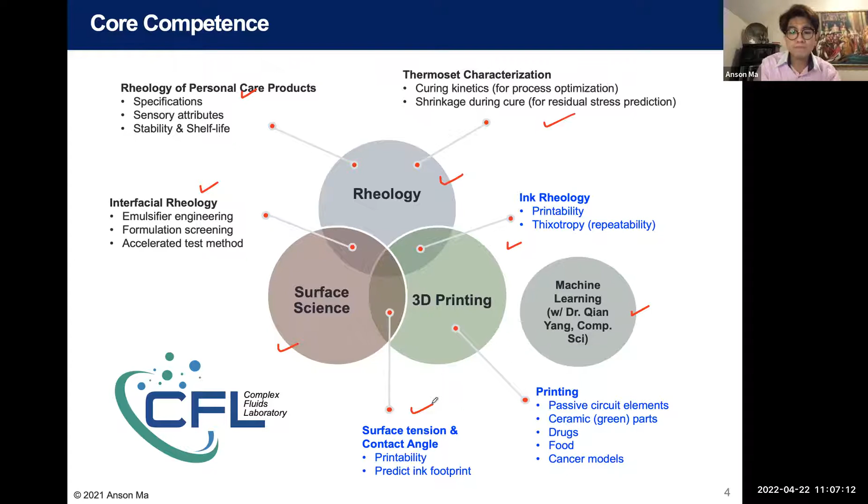In terms of application space for 3D printing or additive manufacturing in general, over the years, we have dabbled in printing polymer composites. There are different ways to do that. I'll briefly touch on that today. Then, driven by the needs from the aerospace industry and more specifically Raytheon Technologies, we started looking into all these different types of sensors that you can additively print. From wear sensors to temperature detectors to even magnets that we can 3D print using different methods.

And then working with colleagues in biomedical engineering and also our medical school, UConn Health, we have been toying with the idea of printing different biomaterials so that you can use it for disease models, or you can think about regenerative medicine applications. In today's talk, I mentioned edible products in the abstract, so we definitely are going to touch on drug tablets. And the last topic I'm going to touch on is food.

So Krishna mentioned that you guys are going to have lunch after this, right? So hopefully I'll make you hungrier than before.

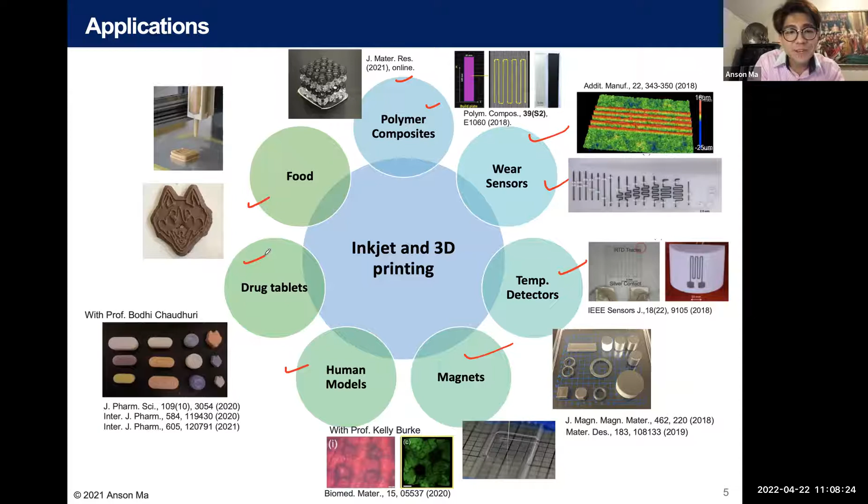So let me first talk about carbon nanocomposites printing. This is very early work that we started. I think this work started because at that time, there's a company called MakerBot. And after the patent from Stratasys expired, more companies were doing this kind of low-cost printer. At that time, you could buy a printer at a relatively low cost. And for research, a few hundred dollars is not a lot for an instrument, right? So we started with that like everyone else.

The way that this printing method works is called fused filament fabrication or fused deposition modeling. You can imagine that you have a hot glue gun. In the back end, you feed a polymer filament, usually a thermoplastic material. And then there's a pinch roller mechanism that is spring loaded, and you push your filament into a chamber. In this chamber, you heat up the material so that it melts. Then you use the filament in the back to push the material that has been liquefied, push it through a nozzle, and start depositing.

So the way I describe it, to remember this, is kind of like a glorified hot glue gun approach, right? You take a hot glue gun and you mount it on a gantry system. There you go, you have a printer. Cost-wise, it's not that much, but to do it very well, it costs money, and to maintain all this temperature gradient and so on, there's a lot of know-how, and also to formulate the right polymers to be able to use these kinds of printers.

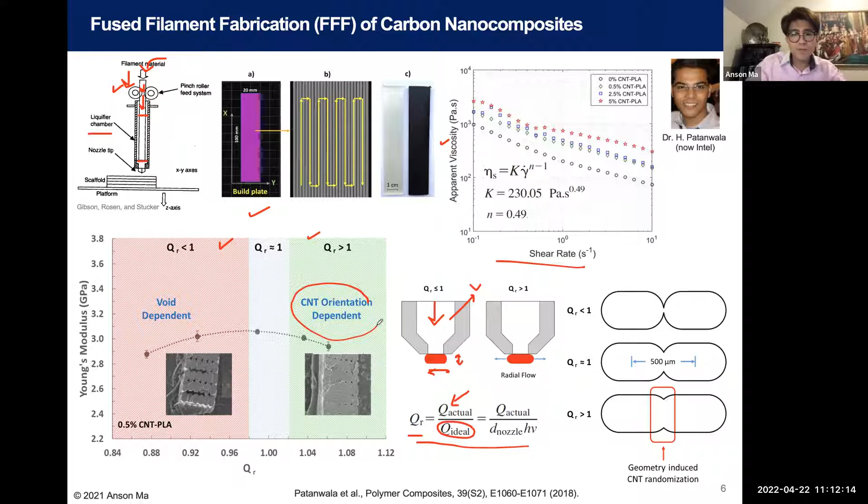orientation of the fillers. So this is kind of like an early work that we did, and we published this in Polymer Composites. So that was a very low entry barrier. Everyone can do that kind of project. Then we said, okay, can we do something fancier and more intricate, for example, like this kind of lattice structures.

What you're seeing here on the right-hand side, the black layers are actually materials filled with carbon nanotubes. And in between, you can see these lattice structures where the more translucent layers are just the neat resin. So here, this is a printer that we put together, and it was work supported by the SHAP3D Center. It's called the multi-material digital light processing method.

So I will play this video and I'll explain as we go. Hopefully it will cooperate. As you can see here, there's two syringes. The clear syringe material will make the translucent layer, and the black material will be infused with nanotubes, and we will dispense this onto a translation stage. So you can see we're creating two puddles: one with just the neat resin, which is a photo resin, and the other infused with nanotubes.

And here you can see the stage moves down. This is the build plate, and there's a projector from below. So now I'm projecting a pattern onto that layer and doing the photo cross-linking for that layer. After that, I move out the stage. You see there's a tiny metal piece here; this is an air system to blow away the excess material. After removing the excess material as much as we can, we dip it into a second puddle with a different material.

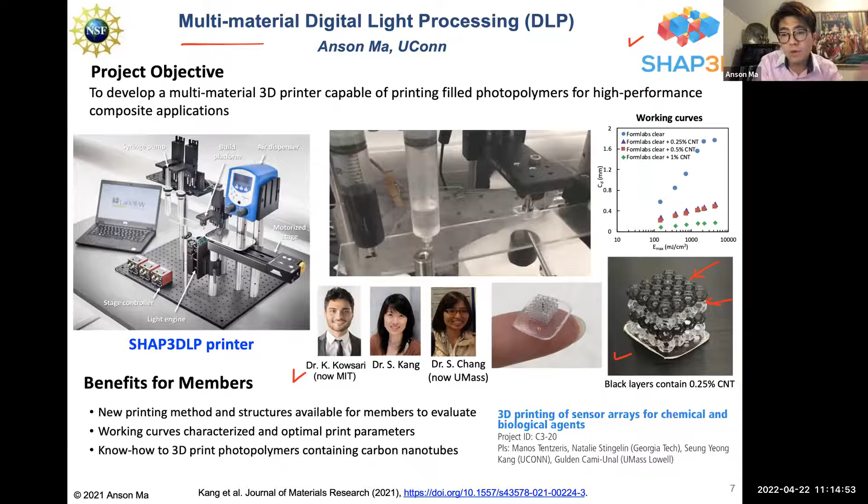This was work done by Kevin and Sally and Xinyun. Sally was a postdoc working on this project, and then she got a faculty position at UConn, and now she's just across the street from my office. She continues to do more work using this platform for making sensors and other wonderful things as part of the SHAP3D project with Georgia Tech and UMass. And I try to be as hands-off as possible.

Now, in addition to polymer composites, we can also think about printing sensors, and this is really driven by the need to serve the aerospace industry, especially in Connecticut. We have the whole supply chain because of what used to be United Technologies, now Raytheon Technologies. This was work supported by them, and Alan was the PhD student who worked on this project.

What we have here is also an extrusion-based method, similar to fused deposition modeling or fused filament fabrication, except that you use gas pressure on the back end. Imagine you have some gas pressure here and then the ink. This is called direct ink writing. To control the printing, we have this rod that moves up and down, with O-rings sealing it off. By moving this rod up and down, we can control the dispensing of the material. So this is a pneumatic drive, but to control it, instead of messing with the pressure, where there's more transients involved.

We actually use the valve to turn on and off to deliver the material. And by doing the printing of the material, we can create sensors. So this is all printed.

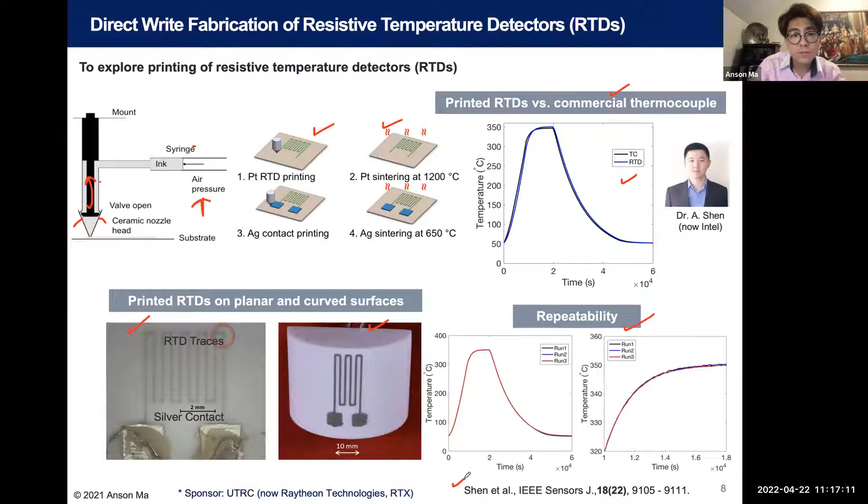Now, since I talked about the importance of rheology, I would like to convince you, and hopefully by the end of this talk, you will appreciate that rheology is important. So let's say you have a new project and someone asks you to do some printing using the direct ink writing method that I just described on the previous slide. And then you have different options of inks, right? How do you know which ink is good?

So rheology is a good way to fingerprint that before you load it into the printer and realize the thing doesn't work, right? Another way to make it work, if it does settle, is to remix it. You can throw it in a speed mixer or something to remix it before use. But this helps you identify how long a workable window you have for the material.

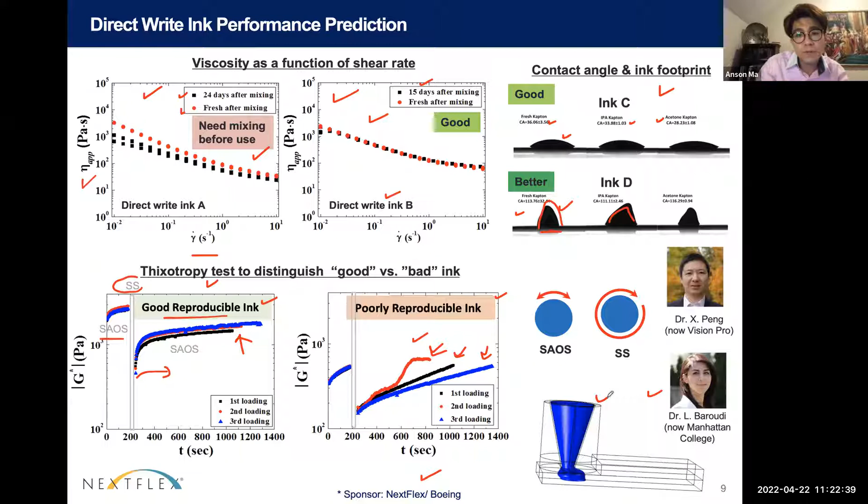And back then also my former postdoc, Lena, she did some simulations. You can also run some simulations, try to understand how the ink rheology would impact the footprint of the line, and also how the processing conditions, like how fast you're dragging the nozzle and how fast you're pumping the material, would influence the print line resolution. And this is kind of the student carrying on that work.

And this is the tool that we use for the direct ink writing. And then you can do different rheology measurements for the materials. These are some of these commercial materials, and some we took the commercial material and did some modification to it. This work has already been published, but the idea back then is to create very high resolution lines.

So it comes back to this rheology curve again. So this is apparent viscosity versus shear rate. All these materials shear thin. Again, the viscosity decreases as a function of increasing shear rate. And in this kind of printing, usually this is perceived to be a good thing, because when you're pushing on the ink material, actually the viscosity drops, right? So it doesn't take a lot of energy or pressure to drive out your material. So that's a good thing.

But once the material is deposited onto the substrate, the viscosity goes up, because on the substrate, you're not really actively shearing the material. So in that case, you'll be more looking at a low shear or even zero shear kind of viscosity. So the higher the merrier, right?

So in other words, shear thinning is usually advantageous for this type of printing, because during the pumping or pressure action, you bring down the viscosity, but as soon as the material is deposited on the substrate, the shear rate diminishes, meaning that you're moving in this direction in a viscosity plot, and then the viscosity goes up. So then you kind of maintain the shape fidelity of whatever you just printed. So in general, it's a good thing.

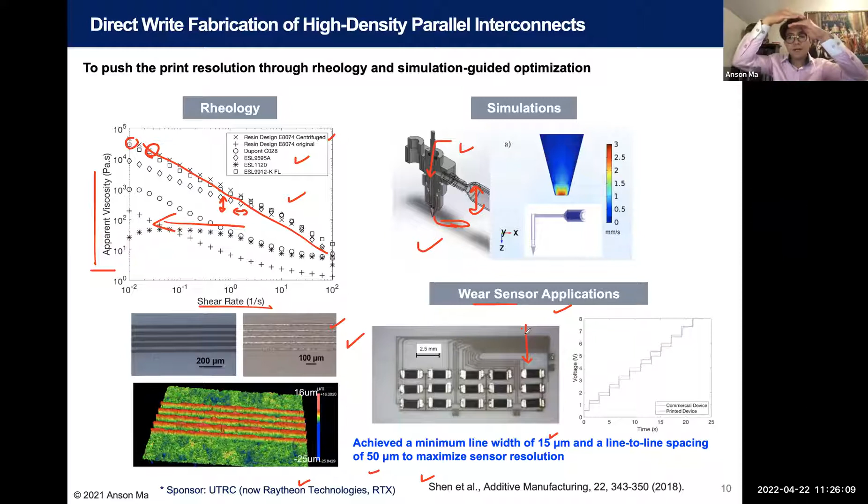So what happened is, imagine this thing is embedded inside a coating. As the coating wears off, it cuts through all these lines. It's going to break some of the circuitry. And then as it breaks, it actually sends off a voltage. So by having all these lines as close as possible, you will have a very high resolution wear sensor.

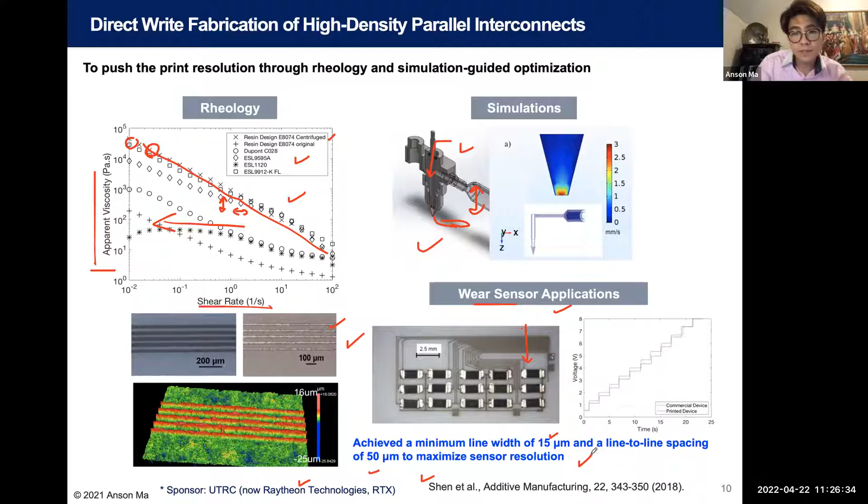Again, it comes from the fact that as the material wears off, you can see a change in the voltage. So the smaller the line spacing that you can do, the higher the sensitivity that you have for your wear sensor. So that's why we want to minimize the line width and also the line-to-line spacing for this sensor. And then the trick has to do with the rheology.

And again, you're seeing a lot of these rheology plots. Probably you will dream about this tonight.

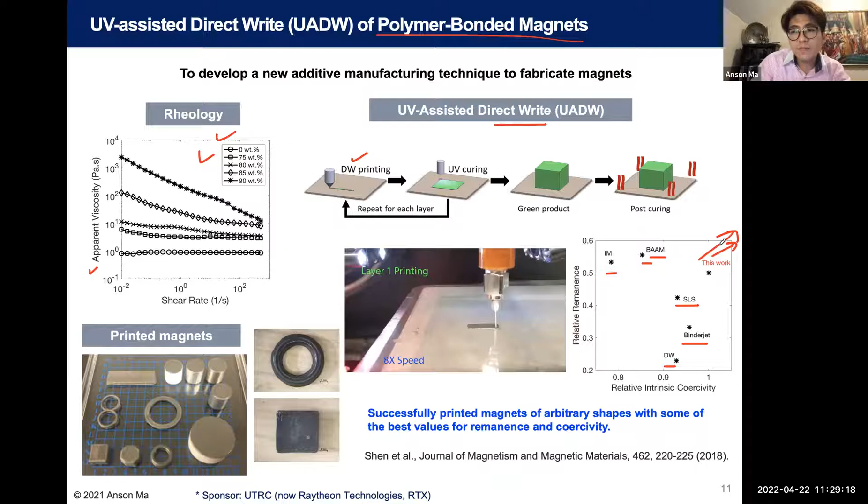So that's the angle of this work that we did. Now, the sponsor was happy after we published that paper. He said, yay, you're doing pretty good, but can we do even better? So can we move in this direction even further?

And the answer is yes, but that got us right into trouble, because one way to improve the performance of those polymer magnets that we 3D print is to use a different source of magnetic particles. The ones that we were using before on the previous slide were made with the atomization process. And then the sponsor said, hey, we have some good stuff that is based on melt spinning.

Now, if you look at the particle morphology, they're much more jagged, right? So it's more irregular shaped. And if you look at the viscosity, when you disperse it at the same volume fraction in the resin, in the photopolymer, it's actually 100 times more viscous. So then we have big trouble printing that stuff. So then what do we do?

It goes back to some work done in the 70s, a long time ago, when people looked at suspension rheology. One thing they realized is that it's not just the volume fraction of particles you put in there, but the particle size distribution also matters. Let's say you have a bimodal particle system: you have big particles and you have small particles.

By manipulating the particle size ratio between the big and the small particles, and also how many big particles relative to the small particles, you can actually find a sweet spot. You can think of this as a space filling exercise, right? You have the big particles, but in between them you have tiny space. If you have smaller particles that fit in that space, you can pack more. So by doing that, you can push up the particle volume fraction without jumping up the viscosity as much.

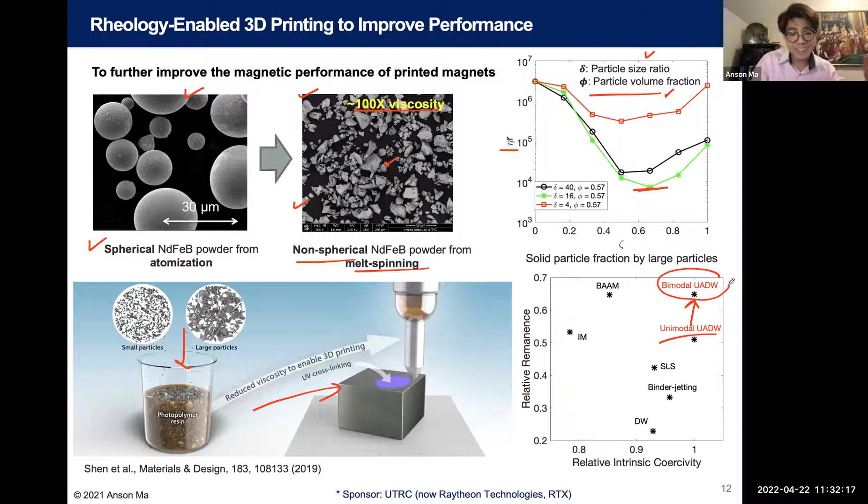So that is again to hopefully convince you that rheology is important, and that some of the stuff you learn in your rheology class may be important, right? Back in the 70s, people already knew this, but at the time they didn't worry about 3D printing. Now we worry about 3D printing, but these good old tricks from the 70s still work beautifully with newer print technology and research.

Now I'm going to switch gears to talk about another print method, which is called binder jet printing. Let me take the time to explain what it is. The previous cases were extrusion based, right? We squeeze out a material, we can do UV curing, for example, but this is a fundamentally different technology. This is based on inkjet technologies. Inkjet has been around for a long time, since the 70s. Traditionally, it's used to make barcodes and graphic printing.

You may have one of those home use inkjet printers sitting at home. Obviously, there's some annoying things about those, right? If you don't use it for a long time, the nozzles clog up and all those issues. We sometimes have similar issues, even with those customized for 3D printing.

Anyway, so what binder jet is: let's say you have some powder material. You first spread a layer of powder, and after that, you use inkjet to jet a liquid binder. Once the binder reaches the powder, it's going to penetrate and wick into the powder bed, spreading both laterally and in depth. So you put a particular pattern, inkjet the binder to glue the powder together, and then you move the build platform down and coat another layer of powder on top.

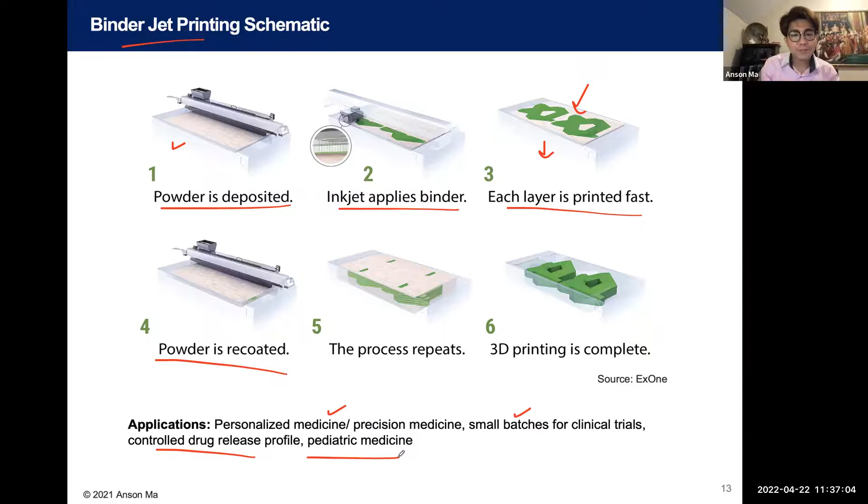And the last thing here is, I gave a talk at one of the pharmaceutical companies. And because at that time we were also making chocolate and stuff, they said, well, that would be nice because our pediatric medicine could use some of that to encourage the children to take the medication.

Anyway, so let's say we were to do some binder jet printing, now you know what it is. For pharmaceutical applications, one of the first things that we want to do, especially if you have a new formulation that you have no idea whether or not it's going to work, is do some kind of characterization. This is a dimensionless number called the Ohnesorge number. You can think of it as a dimensionless viscosity. So the higher this number, that means it's very viscous relative to the surface tension.

And in the inkjet process, you're playing the game of surface forces versus inertia versus viscous forces. So by calculating the Ohnesorge number, empirically, a certain range would give you good, consistent jetting. But as I mentioned, it is a dimensionless viscosity. If it's too low, then you form a lot of tiny drops. It's almost like spraying, not coming out very consistently, spraying all over the place. And fundamentally, that's because of the Rayleigh instability.

But today, I don't think we have a lot of time to cover that. But conversely, if the viscosity is too high, it's also problematic because you don't have enough energy to jet the material. So if you look at a lot of literature in inkjet, this is usually a good starting point. Let's say if you create an ink, you measure the viscosity, you measure the surface tension, you measure the density, you know the nozzle diameter, then you can calculate this number, and that gives you a sense how far off you are from this magic regime 0.1 to 1.

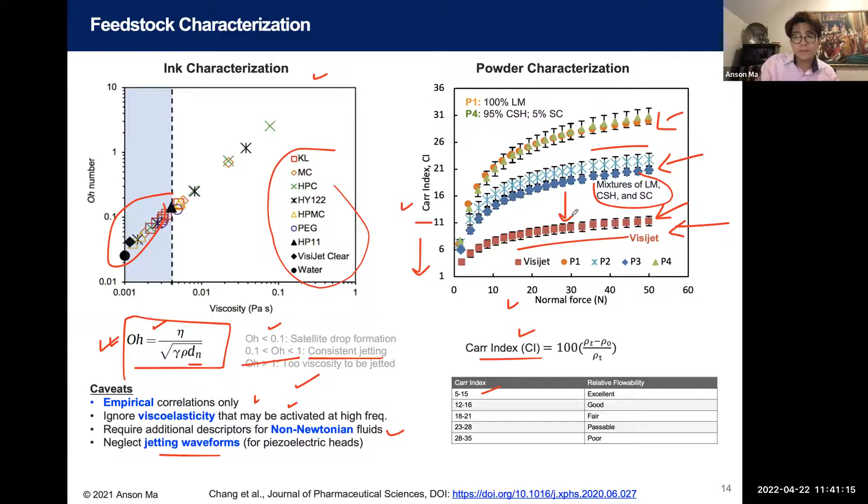So again, this is giving you a sense: if I have a new application and I need to work with a new powder, you may want to do a little bit of this so that you get a sense of how well your material could be spread based on this benchmarking against existing materials.

Then this is a slide just showing the actual print process in action. So this is a commercial printer. It costs about $50,000 from 3D Systems. It used to be called Z Corp machines, but 3D Systems bought them. By the way, there's a lot of changeover and merging in the 3D printing space because it's still a high growth area.

And if you look here, this is just having the powder spread, and then you can see the bar comes in, and then you can see the inkjet head that's moving. And then we keep on doing the binder jet process. And then you can go from digital design like this. And you see a lot of UConn and Huskies, not surprisingly, Husky is our mascot for the sports team. So we can convert from a digital design to various designs. It's very flexible. You don't need to change the mold or anything. You just change the digital design. If you have the right formulation, you can print.

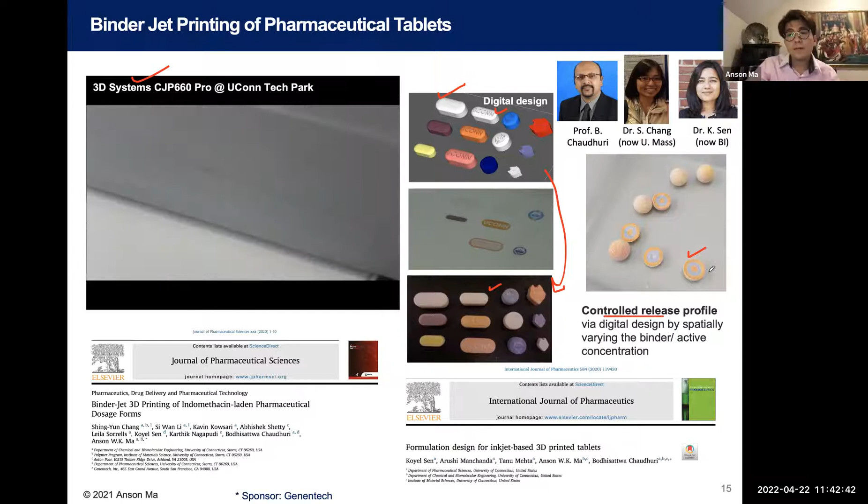And this is what I was talking about earlier, right? By doing this digitally, you can also change the design so that you can have these concentric spheres. Like you can see, I pretend that the orange color is one drug, the blue is another drug. So you can do sectioning, A, B, A, B. And then by the time this releases, it will come out in an alternating sequence. So that's the beauty of doing printing for pharmaceuticals.

And then after 2 years, we learned how to play with that commercial machine and hijack the machine essentially. Then we built our own machine. So this is called Husky Jet, and there's a YouTube.

I'm not going to play it here, but there's a YouTube video for this Husky Jet. This is a tool that is about 7 feet long. It's much bigger in person than in the picture. And it comes with all the bells and whistles and all these systems, which I'm going to highlight a little bit. So it comes with the inkjet print heads, obviously, and then it comes with UV curing capability, infrared capabilities.

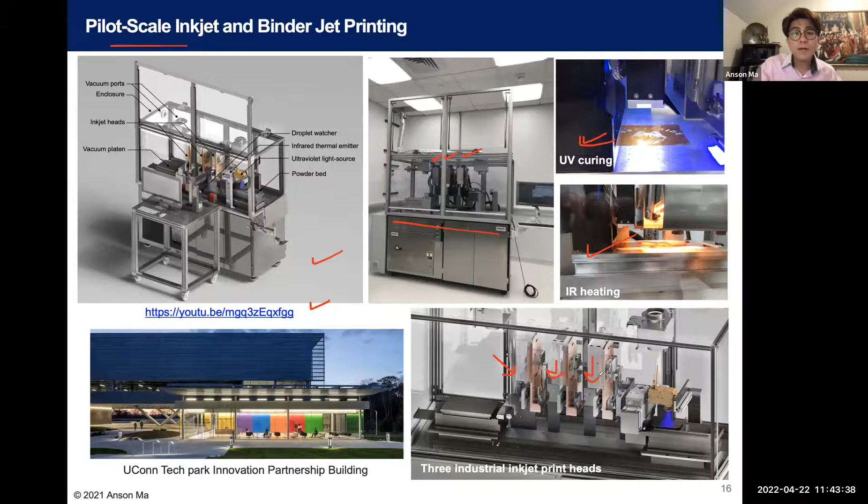And we have 3 industrial print heads here. These are high throughput print heads. You see these are pretty much fixed mounts because they're too heavy to move around. So you can use this kind of print head for high throughput roll-to-roll processing, for example. And then the first test that we did was, we take this and then we have a drop watcher system so we can put in some different materials.

This was a small project that we did on printing dielectric ink on various flexible substrates for the NextFlex Institute. And then you can put down silver ink in different patterns to make passive circuit elements and things like that. This is an animation I'm just going to show quickly. So the Husky Jet could be operated in the binder jet mode as well. And now hopefully you know what binder jet is.

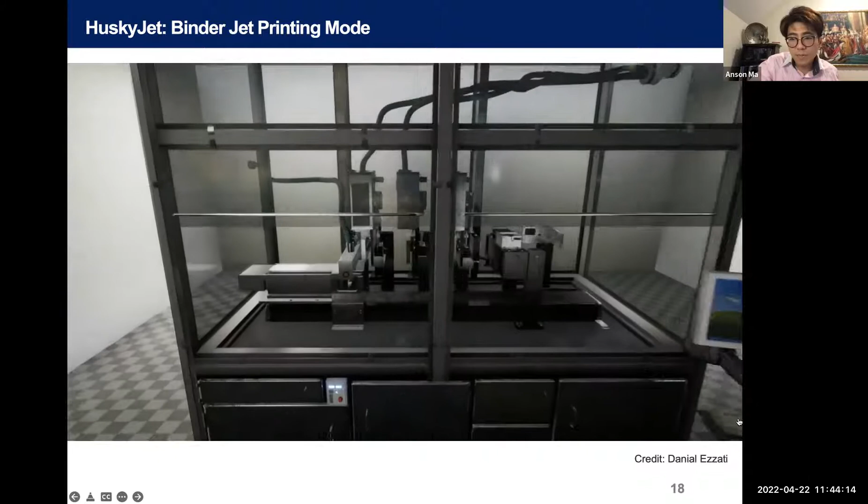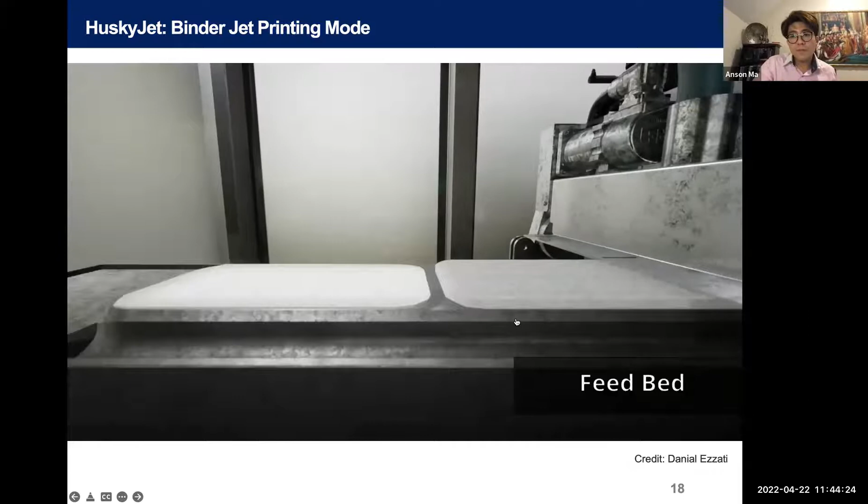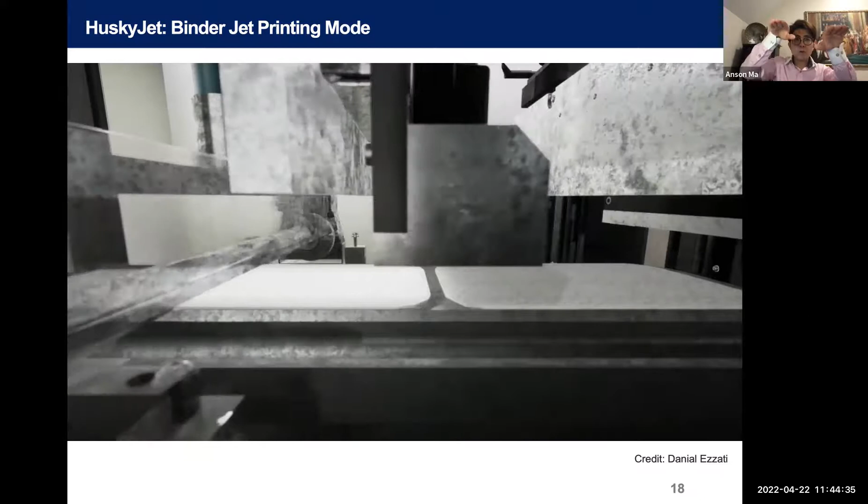So this is just zooming in, let me mute this. So there are 2 powder chambers. This is the feed and this is the build. The one that is closer to this view is the build. And then what happens is we are moving the build and the feed beds, and the powder is being pushed from the feed to the build. And then we can control how much feed material by how much we raise the first platform and how much we move down the second platform.

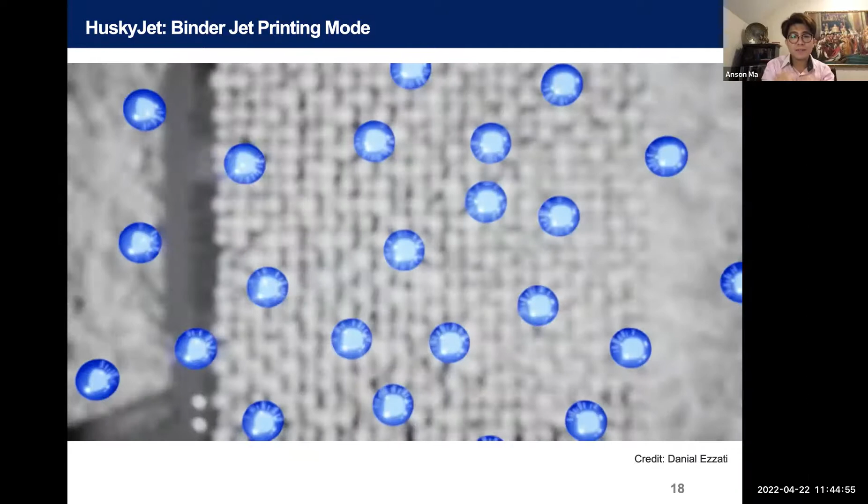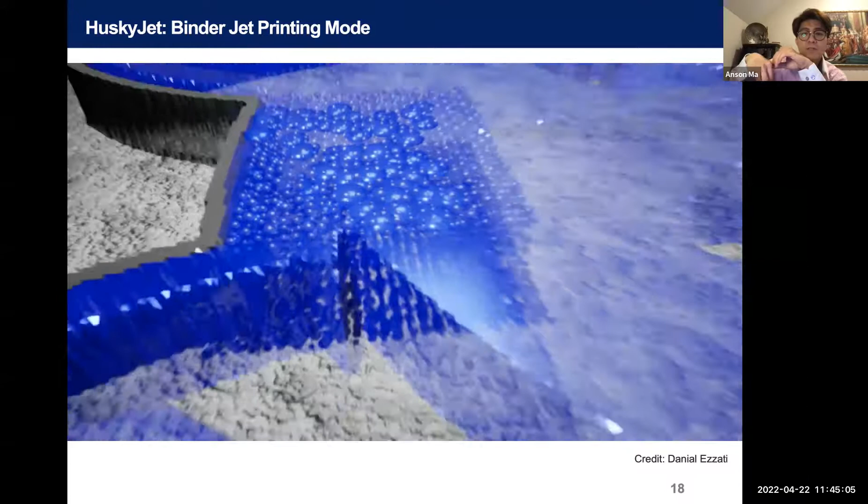And after that, the whole unit moves under the inkjet print heads. And then you can see the inks are coming down, and it's kind of gluing the powder together. And this is an animation showing how the ink droplets impinge the powder, and then you have some spreading and some penetration as well. And then, again, this is Husky. So sorry for the hassle, but this is a UConn machine.

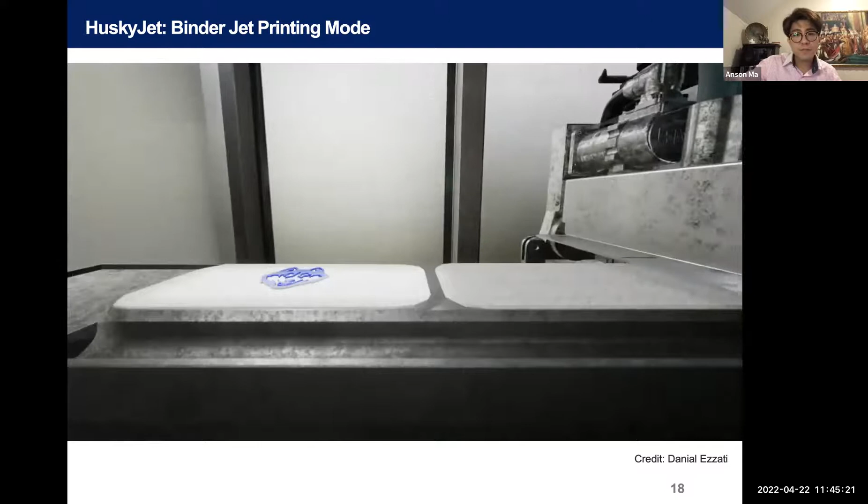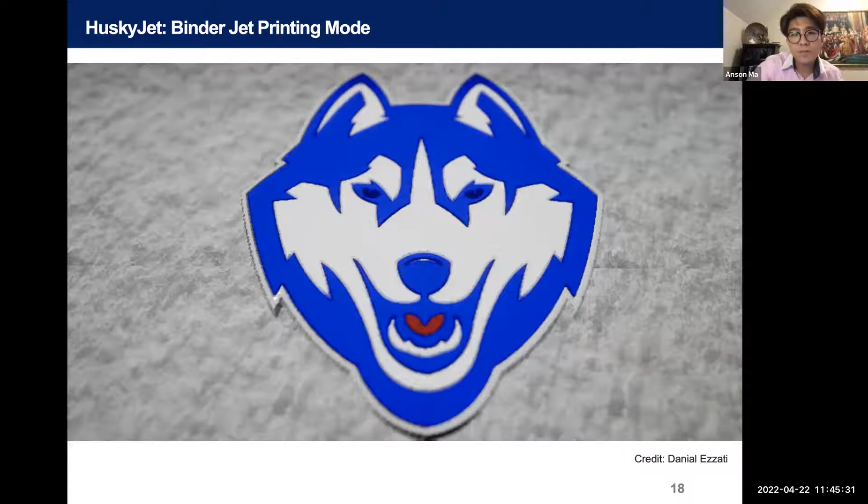And then you can put down different colors. We have 3 print heads, so we can put down up to three colors, 3 different materials. And then this process is being repeated. So you keep going back and forth, back and forth. You do powder spreading, inkjet, powder spreading, inkjet, so on and so forth. So then you can make the whole husky. This is the HuskyJet.

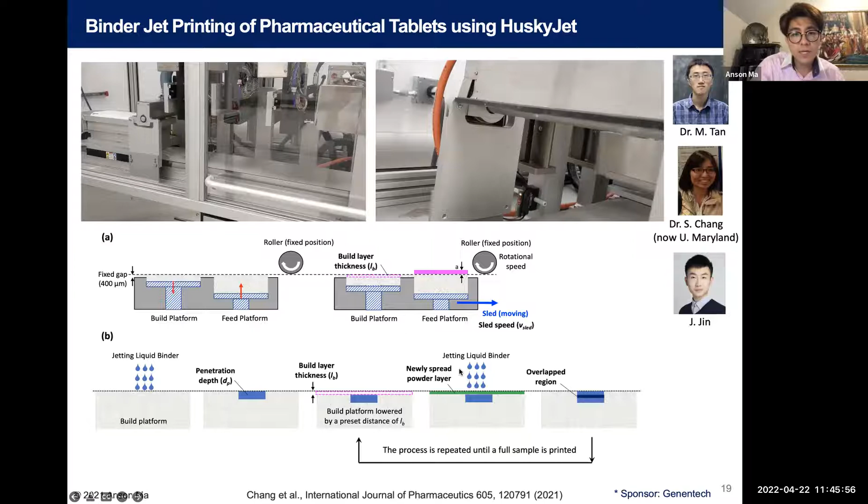And then in reality, not the metaverse, this is how it works. So it's kind of like in the animation. We're spreading the powder using this roller mechanism by moving the whole build platform. And then we have some process parameters that we can control, and then we can make 3D parts. And we use it for making pharmaceutical tablets again. And because we built our machine, we have full control in terms of the process parameters.

One important parameter that you want to consider is, let's say you have the powder and you jet down some ink, how much binder is penetrating in the powder bed. The blue color here indicates the thickness, how much binder is wetting the powder bed. And imagine that if it doesn't wet too much, and you spread a lot of powder on top, then when you print the second layer, there would be a disconnect between the first layer and the second layer. And the sample is going to be very weak. It tends to delaminate.

And theoretically, you can have one, right? Meaning that the thickness of the penetration is comparable to how much powder you roll on top before you print the second layer. And in case 3, basically you can tune this. I call this degree of overlap. So essentially, the higher this value, the more liquid binder per powder ratio you have. And you can see a beautiful linear regression here showing how the strength of your tablets depends on this process parameter.

And we also benchmark our work against other people's work. By being able to control all these process parameters, we were able to make fast disintegrating tablets that disintegrate in 10 seconds and yet have reasonable breaking force. For the commercial tablets, we're talking about 10 to 15 kilogram force.

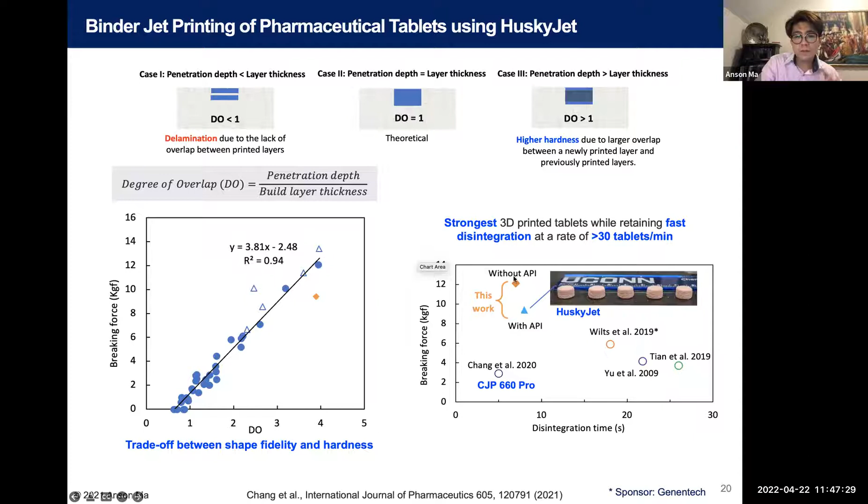So here, we are definitely ballpark, reaching the commercial ones. Now, since I don't have a lot of time left, I'm gonna just talk a little bit about the food. Some of the food printing work is still ongoing, but the big goal there is to explore two things. One is the tunable texture. So by changing the formulation or by changing the digital design, what kind of texture we can create for the sensory for food.

The other angle really has to do with the person's nutrition. So again, depending on the genetic profile of the person, physical activity, the clinical history and dietary preference of the individual, whether or not we can additively print the food that would tailor for that person.

And we picked binder jet printing. There are a couple of reasons: it's very suitable for making low moisture product, and also it doesn't have to formulate a paste, which could be problematic. Sometimes you cannot formulate a paste that is printable. So with binder jet, you don't have this problem because you're dealing with the powder and the ink separately.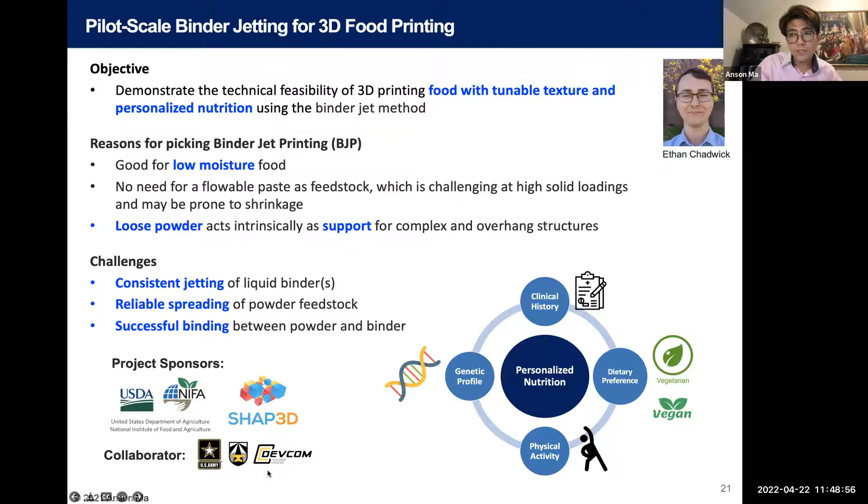But there are also challenges. How do you figure out how to jet the ink, how to make sure that you spread the powder successfully, and also the right binding between the powder and the binder. So this is work supported by USDA NIFA, and also SHAP3D, and also our collaborators, the US Army Soldier Center, the Combat Feeding Directorate.

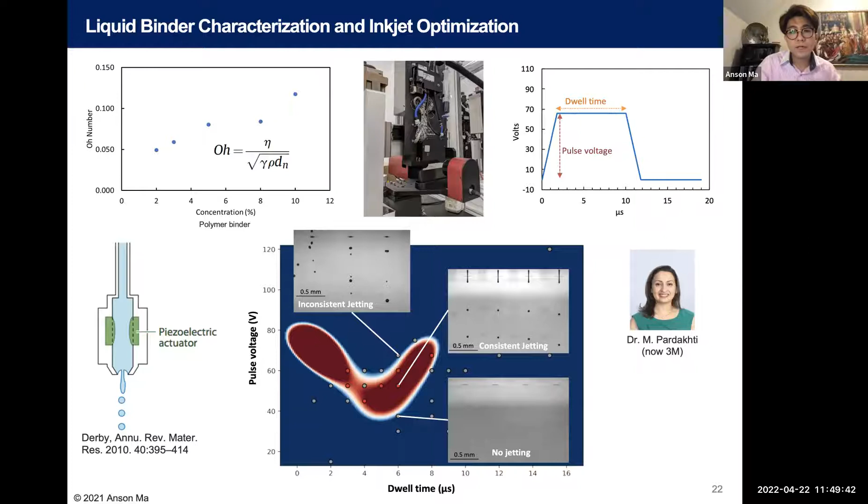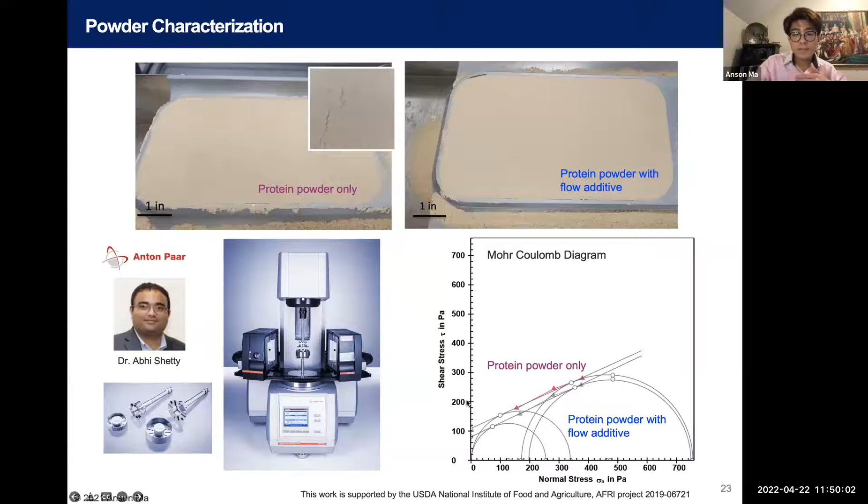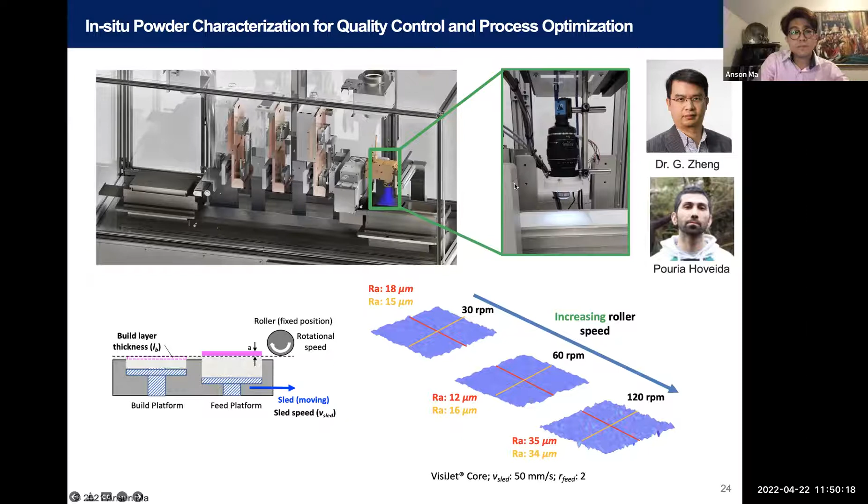And then we also build other tools because we have our own HuskyJet. So in here, we build a camera system so we can actually do a topology mapping. So after you print each layer, we can take an image, and then do some kind of process optimization on the fly or quality control.

And I would like to spend a little bit more time talking about this one. So this is where we start collaborating with the computer science and engineering department and Qian Yang's group. There's a lot of machine learning and interest in that area, and there are different tools in the toolbox that you can pick to solve problems. But here is an example.

So let's say you want to print this structure, and I have a camera that can look at what I just printed. And this is a real camera image from the sample. So you can see, for example, I have some defects here, right? There are some lines that are defective because I have the missing black lines. This is what I want to print. This is what I have now.

And what the machine learning code allowed us to do is to identify where the defects are. Of course, we can improve the accuracy here a little bit more. But once you know where you have the missing dots, you can come back and repair it, right? And then you check again and say, okay, now it looks pretty good. Again, there's some work to be done in improving the accuracy of the defect detection part.

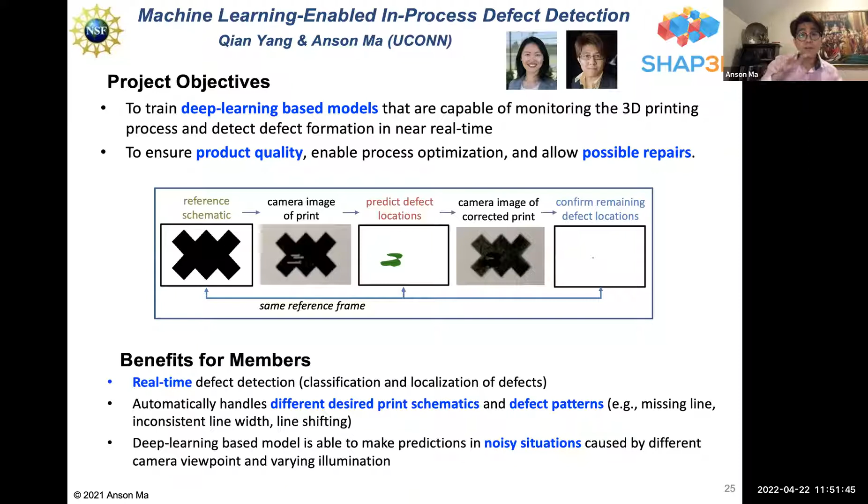But this is the proof of concept that you can take a camera image during the print process, and if you have any defects, depending on the application, if the defect is too big and you don't want to start over again, right? Then you can think about this kind of corrective action to salvage the part that you're printing.

And I know I'm running out of time, so I'll just be brief here. This is kind of bringing home the message that you can change the digital design. So these are some sugar candies. The blue core is actually a formulation where the sugar is plasticized, so it's kind of soft and gluey, but the red part is actually very hard. So then you have these core-shell structures.

By manipulating how big the core is relative to the shell, you can engineer the overall texture. So you have some kind of texture for these candies, and you can manipulate that by the formulation and also by the digital design. That's something that we did for fun.

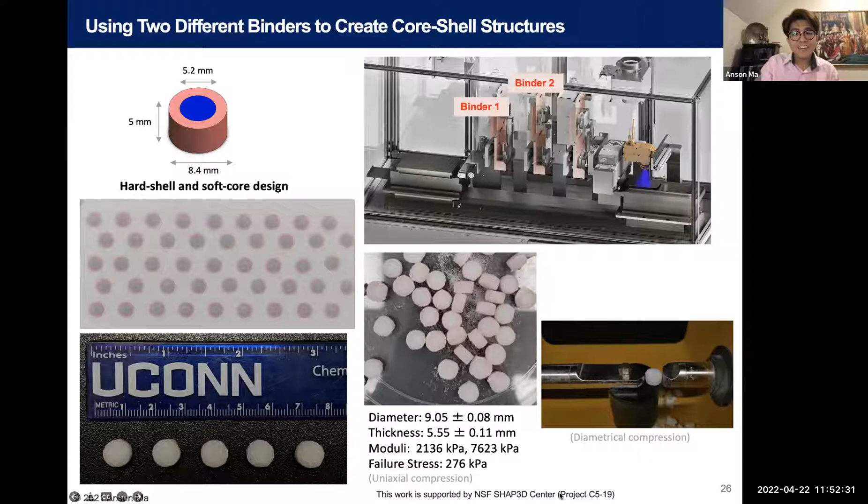So with the candies, the other USDA project that we got funding for and collaborate with DEVCOM Soldier Center on is the idea of personalized nutrition. Let's say you have soldiers with different calorie requirements depending on the activity, and you want to send that information, together with what nutrients that person may be deficient in, to a printer, print it, and then have a drone deliver it. So that would be one idea of how and why you want to do 3D printing for personalized nutrition.

But with the USDA, we're also interested in, if you take some kind of plant proteins, how can you make it printable? And we had to overcome quite a bit of challenge in terms of formulation and process optimization using all the tools that I just mentioned, to go from something that is really crappy here, where we cannot print anything, to something that's really nice, and we can make it into different shapes. We can change the density and so on and so forth.

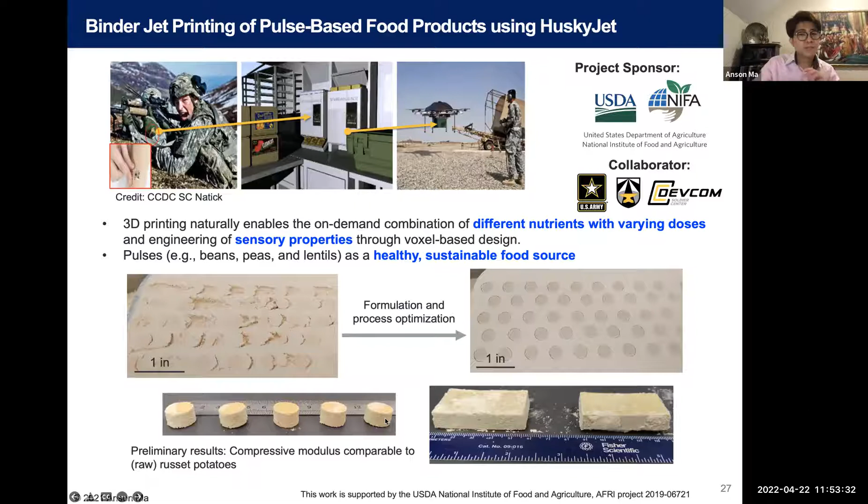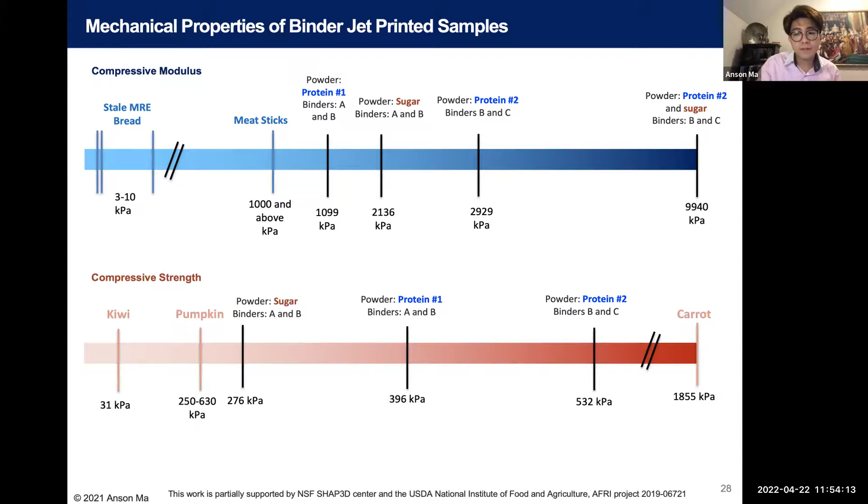So with that, I think I'm going to close, because I believe I have overwhelmed you with a lot of information. But the key thing here is that rheology is important. And if you ask me what's next, the direction we're heading towards is having printers with all this integrated in situ metrology, and also bringing in tools like machine learning so that it can be smarter. So we're building a brain for the HuskyJet so that it would be smart enough.

The dream for me at this point is to have something like an autonomous 3D printer. That's something that we're working on. I'm not ready to share what we are doing yet, but imagine it's like an autonomous vehicle, but in a 3D printing sense. As an end user of the technology, you just go to the lab, put the materials in there, walk away, go to the beach and come back, and everything will be done. And then the machine is going to tell you what to do, only if you can trust the machine. So that's one lesson learned from us.

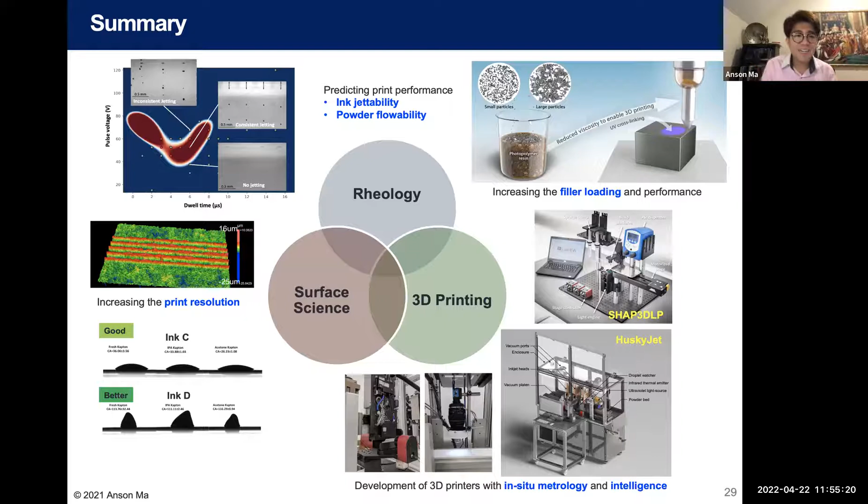Yeah. Thanks a lot, Anson. I think let's open the floor to questions. I'm sure there are going to be a lot of questions. Let's try to keep this going quickly. I think Ankit, you had the first question, followed by Bruno, and then we'll have more questions.

Okay, yeah, thanks for the great talk, Anson. Very fascinating to see the range of materials that you can print. The question I have is related to densification. Is there a way you can dial in the densification at the time of manufacturing rather than resorting to post-annealing treatments? So you mean, is there a particular print method that you're thinking about, like extrusion?

No, I'm thinking about the binder jetting, where if there is something you can do to, say, for example, change, I don't know, some process control that can be adopted to dial in the densification in these products. Yeah, so actually that's a good question, because a lot of what I show here is the actual print process, right? But the post processing is actually sometimes even more involved than the actual print process.

For example, in a binder jet, typically you're making parts with a porosity of like 40 to 70%. So being able to densify that is important if you're looking to get rid of the air trapped. There are a couple of ways that you can do it. One is that in binder jet, a lot of people do some kind of infiltration with another resin after you print. That's one way.